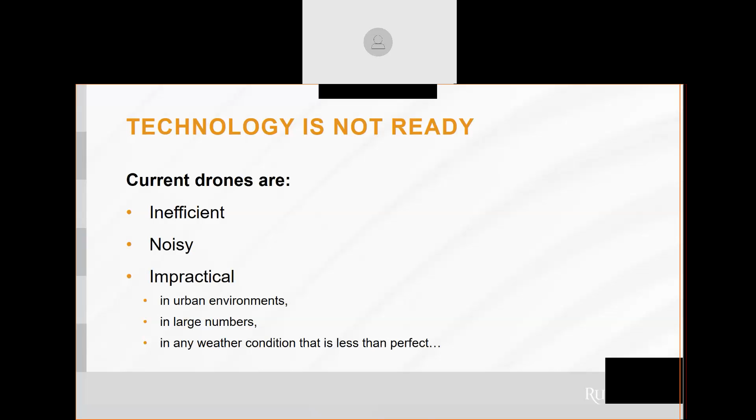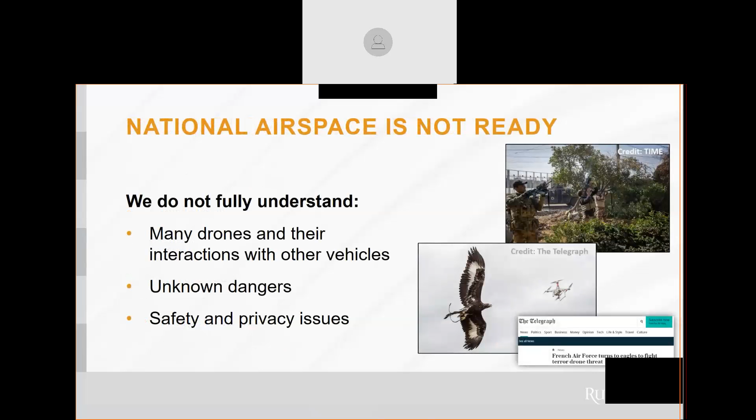So to move forward, we need facilities to design, manufacture, and test drones. We also need to be able to control air traffic due to operation of these drones. And we recognize that no such place currently exists. So we proposed a solution. We believe that the airspace and technology issues will be solved in the next 2 decades by research and development. But the solution is really to enable that research and development and to enable operation of vehicles developed with that research. So to this end, we propose to establish what we call a drone port. Okay, this would be the world's first center for aerial automation.

So in the long run, a drone port should look, or function at least, as an airport-like facility with an ability to serve a large number of air vehicles and passengers. And a drone port could essentially be located in an urban area. So, for example, like the Penn Station for trains or the Port Authority for buses in New York City. And in this image, this artist's rendering, we're showing a bespoke design of a future drone port vision located in Manhattan to show how a drone port might look in the future.

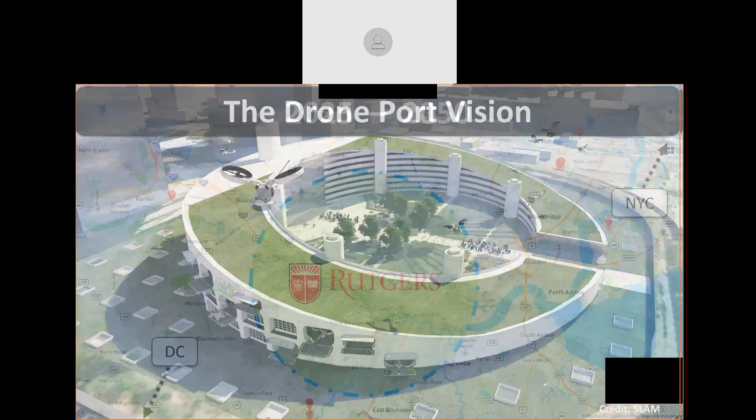And these applications would include food transportation, medicine, first aid delivery, emergency Wi-Fi service, agricultural automation, environmental monitoring, so on and so forth. So it's clear, right, that a drone port in Manhattan is not yet feasible. And we also know that such a facility cannot be possible without institutional capacity and also starting this in the right location. So we thought that we could do this in Rutgers or near the New Brunswick campus.

So this is a map of the campus in New Brunswick. And a drone port on or near the campus would allow us to have locally controlled airspace. And in fact, we don't have any restrictions within this airspace that is shown here. So one of the advantages of being in this area is that we're located in the busiest metropolitan corridor in the United States. Our location has access to New York City, Philadelphia, DC, Boston.

The area supports a 1.6 trillion gross product economy, and this is larger than all but a handful of economies around the world. And New York and New Jersey are home to the nation's most extensive public transportation network and two of the largest container ports on the East Coast. It's also the busiest location for supply chain activities in the nation. So we thought that there's simply no better place to build a drone port.

Okay. So from 2025 in the short term to 2050, the drone port at Rutgers will primarily serve for research and development. And as research ramps down, the passenger transportation would ramp up, along with the regulations and technology. So in the future, the Rutgers drone port will actually become part of a network of ports all around the world. So this is just potential airways to different cities, and of course, urban transportation within the cities.

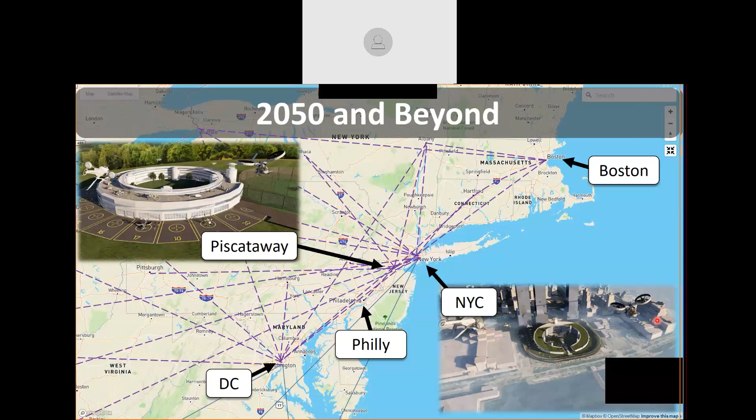So there could be flights across the nation, and all of these so-called drone ports could be modeled after the Rutgers drone port, which would have been the first one of its kind. And so who knows? Maybe either my vision or somebody else's vision of a drone port will actually become a reality in the future. So this is kind of a summary of the proposals that we made.

Okay. So my main goal has been to propose, model, and test mechanically simple designs to solve common engineering problems. So what do we mean by smart materials? Smart materials can be materials that change their shape due to external stimulus beyond what so-called conventional materials do. We know that many materials, especially metals, expand and contract because of temperature. However, this effect is very minor and it's not very useful in most cases.

However, when we talk about smart materials, we can actually have metal alloys that can change their shape significantly with the change of temperature. Certain materials change their shape because of applied electricity. That would be called a piezoelectric material. Some materials have the ability to heal themselves after they have been broken or separated or cracked. These are self-healing materials, and these would also be considered smart materials.

So instead of taking common materials or traditional materials and assembling them in complex fashion to get functionality, if we can actually build function within the material and use the material by itself without combining it with other systems or other materials, then we can make much more efficient and lighter structures and much more intelligent and

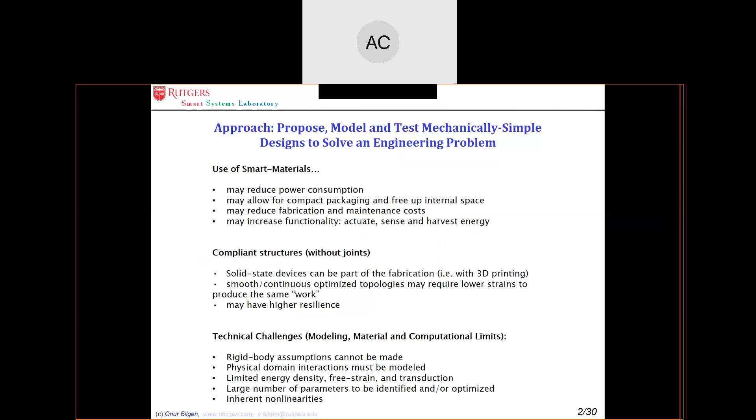So I don't want to go into too much of the technical details. I'll just talk about a few things. The material that I'm going to be showing today is a piezoelectric material. It's a type of smart material. Basically, what it does is that when you apply force to it, it produces electricity or charge. In return, if you apply electricity or charge to it, then you will get motion.

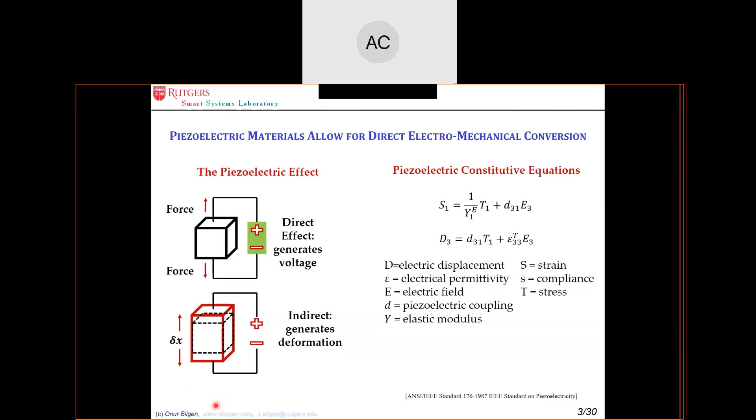So this so-called indirect piezoelectric effect is what I'm going to use to apply electricity to the material to change its shape, and this shape change will be used to change the shape of aerodynamic structures. And we do this based on a very simple mechanism. So let's just look at this one here. We have an active material, or a piezoelectric material. I will apply voltage to it.

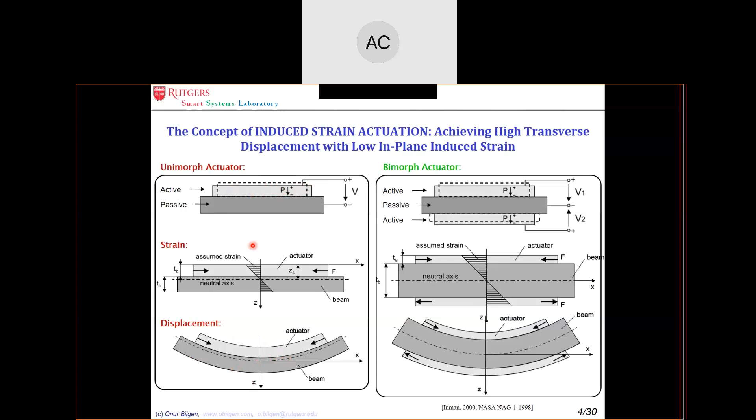And when this material at the top surface expands, it actually moves the passive material attached to it. And because there's an offset of this expansion force at the top level, the overall motion is a change in curvature. So this plate expands in the horizontal direction, whereas the overall structure changes its curvature. So this is the underlying mechanism that we're going to use to generate large shape deformation using a very small amount of motion.

Okay? So here's the outline of my presentation. We'll first look at smart materials and their application on small aircraft. This is kind of the beginning of my research. Then a few years later, I moved on to airfoils. Then I worked on a solid-state ornithopter, which is more of a bird-like drone. And then recently, I've been working on applying a similar technology, this kind of compliant, bird-like, wing-like technology, onto rotors.

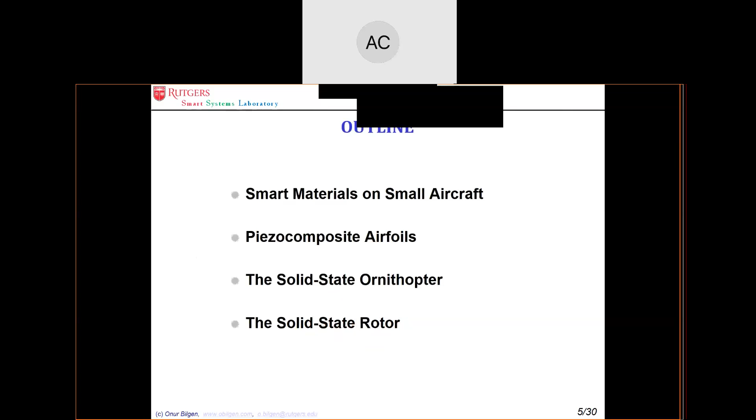So we're going in chronological order here. Demonstration on small aircraft. When we first began this research, there were very few examples. In fact, there were no examples of exactly what we did. So in 2006, 2007, when I was a student at Virginia Tech, I modeled, simulated, fabricated and then tested this aircraft, which has these piezoelectric materials.

So these orange patches here are patches that deform the surface. When you apply electricity to it, this wing actually changes its curvature. It cups, or basically curls, as the electricity is applied. Normally there would be motors and actuators, maybe 10, 15, 20 different parts to achieve the same thing. With this design, we achieved the change in shape of the wing with technically only two parts, the active material and the passive substrate here.

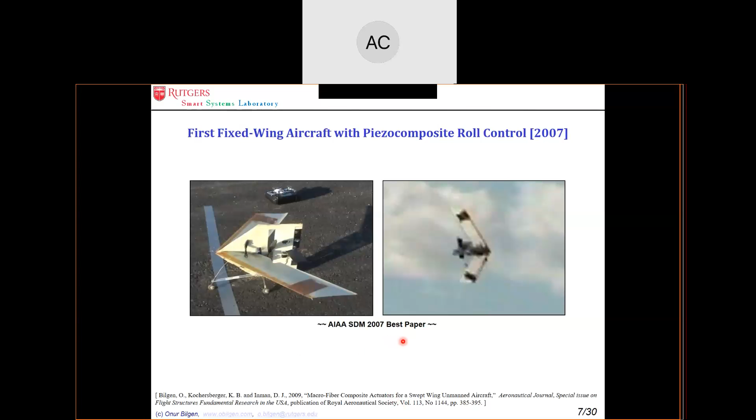At one of the conferences, the AIAA SDM conference, this research received the best paper award for the entire conference. So that was one of the starting points for us. I then went on to co-advising a senior design project with my advisor at the time, based on that aircraft that I showed you earlier, which was actually my master's thesis. So during my PhD, I worked on this.

One of the things that we had to solve in this project was electronics, small electronics. These actuators use high voltages, and at the time there were no compact electronics to get from low battery voltage up to high voltages. So this is one of the challenges that we solved.

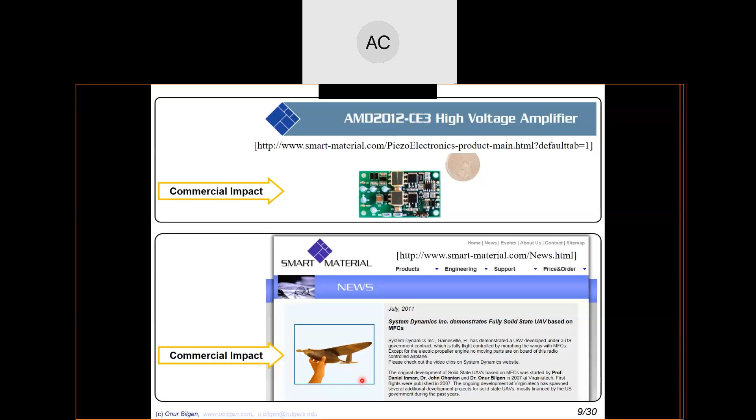So to remove the propeller, to have the wings create not only lift but also lift and thrust, is actually a big challenge. So this is actually one of the projects that I'm working on now. Right.

Next thing that I worked on are the piezo composite airfoils. So I'll just talk about modeling and optimization very quickly. In every step of my research, I try to do the research process from A to Z as much as possible. So I start with conceptual design and then some detailed design and then modeling and then simulation and then optimization and then testing certain specimens and validating them.

So this is one of the concepts that we came up with to address some of the drawbacks of the previous designs. We thought about where we can put the piezoelectric materials, how we can hold this airfoil shape, okay? To be clear, what you're looking at is an airfoil. Airfoil is basically the cross-section or a slice of the wing, okay? You can think about the wing, either the bird wing or the aircraft wing, protruding out of the page as you're looking at it. And if you take a slice of that wing, this is what the interior structure might look like.

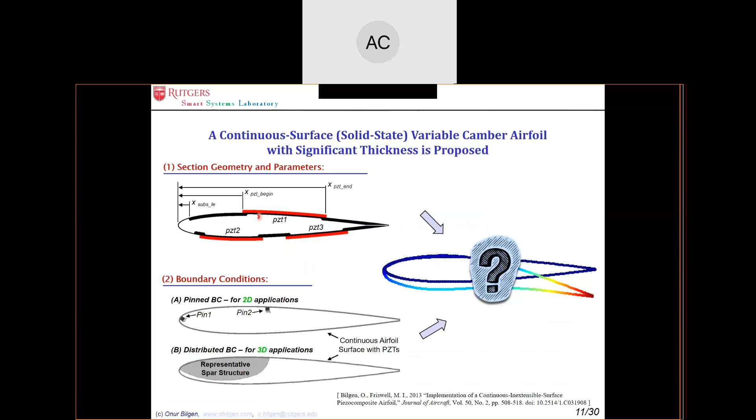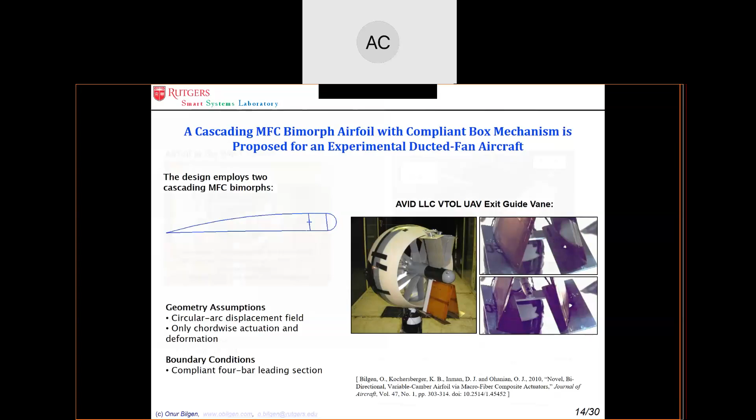So we did some modeling, simulation, and optimization. We don't need to talk about this now, but that led to some prototypes. So this is one of them. This is where we developed, again, an airfoil, a slice of a wing, using two different types of piezoelectric materials that are on top of each other. And we put this 4-bar mechanism to give it the right motion. And then that led into this prototype that you can see here.

So you can see that the motion of the wing or the airfoil, in fact, looks like a bird's tail, perhaps, except that there are still some mechanisms here that are not very desirable. There are benefits and some simplification because we used smart materials, but there are still mechanical components that are not desirable.

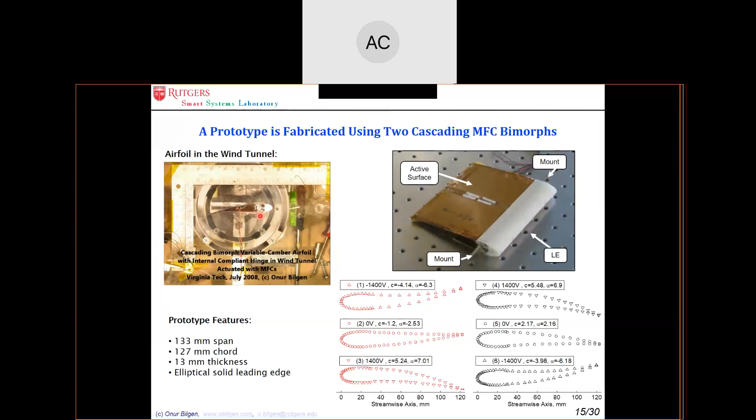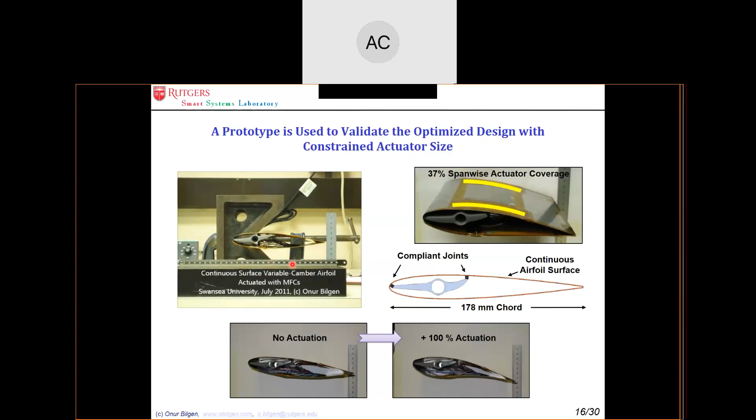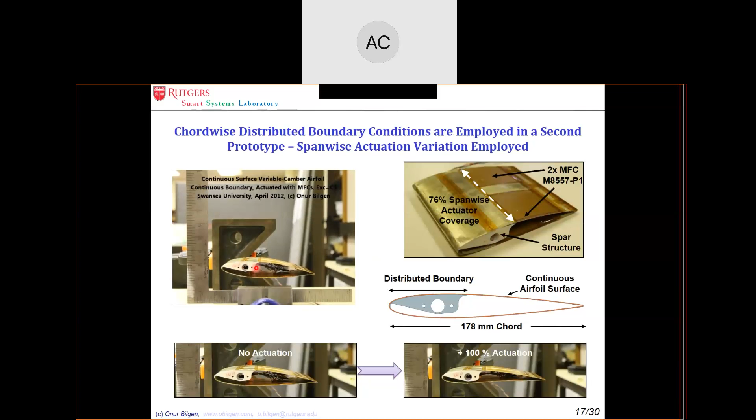So we went on to trying to eliminate those mechanical complexities, hinges, etc. So we did some additional modeling and simulation and optimization. We came up with this structure. And then also we came up with other structures. So this one is another airfoil that we optimized for a different type of conditions. In this case, you see the airfoil doing some sort of a breathing type motion. So this actually led to us thinking about a pump using this structure, okay?

Right. So from that research, which is just a section of the wing, what we call an airfoil, we thought about trying to look at the entire wing, and in fact, use the wing not only to produce lift, but to produce lift and thrust at the same time. So this is what birds do. Birds achieve flight by using their wings, just as fixed-wing aircraft do, to generate lift if they have forward velocity, okay, or any kind of velocity, but also to provide that forward velocity they have to overcome the drag force, so they need propulsion.

In a fixed-wing aircraft, the propulsion is achieved by either the jet engine or the propeller that you see mounted on the wings or in front of the nose of the vehicle, depending on the aircraft that you have. Birds achieve this by simultaneously using their wings to flap in different orientations to achieve not only lift but also thrust at the same time, right? So they can produce propulsion and they can use their wings to generate lift and also to do maneuvers.

So we wanted to be inspired by this mechanism, and so we wanted to make a drone or an aircraft with flapping wings, and these types of devices or systems are called ornithopters. So we looked at actually a preserved wing of a great blue heron.

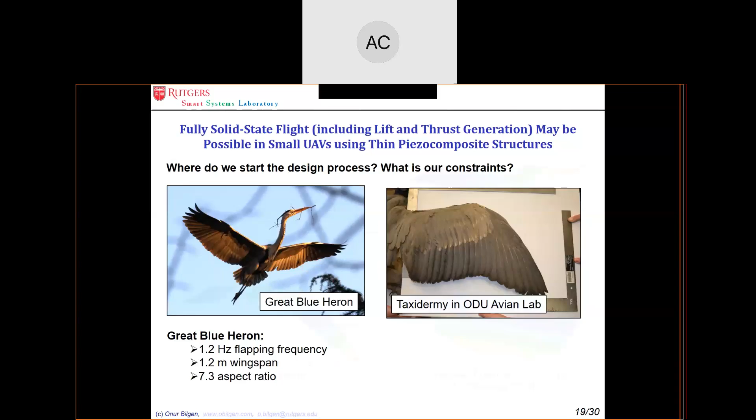We did, again, dynamic modeling of the wing. We looked at different motions that it generates at different frequency of excitation. We then took carbon fiber. We manufactured a wing mimicking what the bird wing looks like, the great blue heron wing looks like. We added these smart materials or piezoelectric materials on the wing to make the wing flap, pitch, and heave.

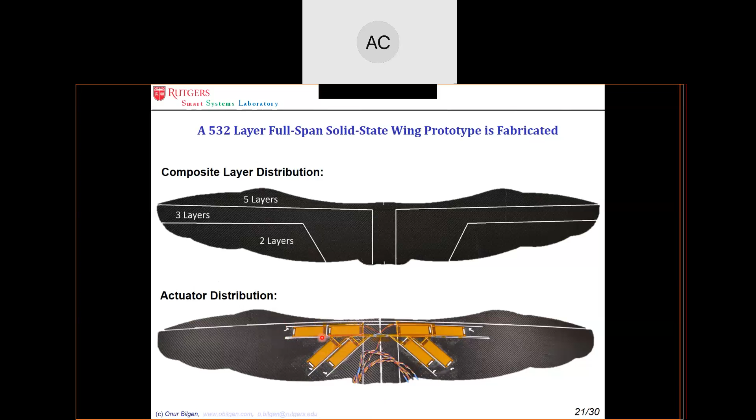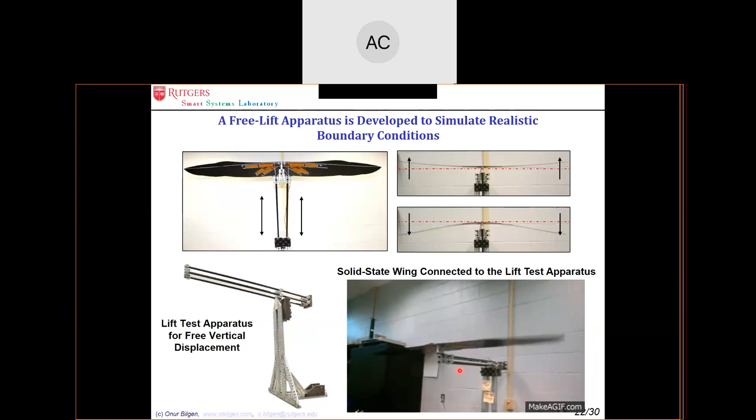And then we developed a test apparatus to kind of be able to test this wing. So now you see that using these piezoelectric materials just adhered on the surface of the composite, the wing is flapping just like a bird, okay? So this is still far away from generating thrust, but we're basically making progress towards that goal at this point.

So in parallel or soon after, I also started taking this idea of moving the wings of a bird-like drone into basically the blades or the wings, so to speak, of a propeller. And this actually is what ties into the drone research. So the idea here is that, as I mentioned earlier in the first presentation, the major problem with drones is the noise that they generate.

And of course, that's the major problem with helicopters, aircraft, and this is the reason why operating a helicopter or a helicopter-like device in your driveway or an airplane-like transportation system in an urban environment currently is just unimaginable. It's just not practical and it will not be accepted.

So the problem is that the common propulsion system, which works by taking a wing and simply rotating it in place, generates a lot of disturbance to the flow, which is necessary to provide the propulsion. However, it creates this fluctuating flow, which then yields large levels of noise, acoustic emission, and this is what becomes unacceptable in many urban conditions.

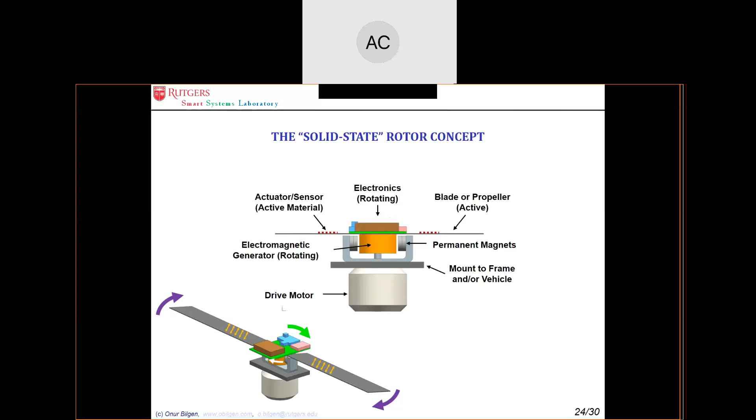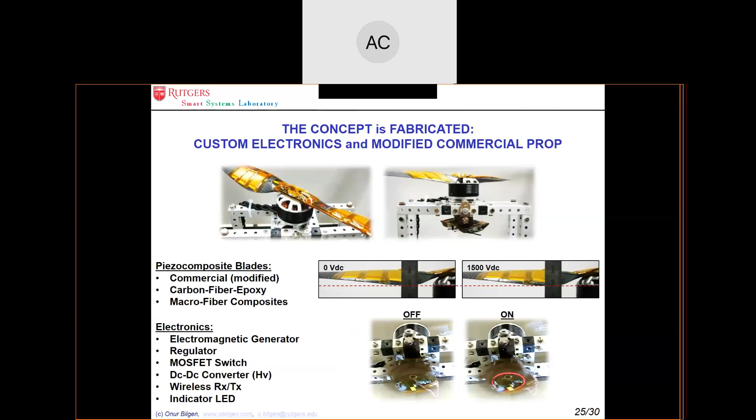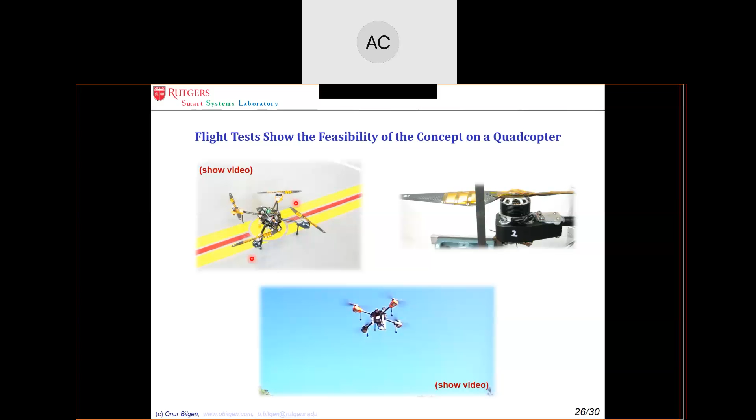So we successfully developed this idea. We built a prototype. We showed that it is operational. And we took that idea and then actually built a small quadcopter or a drone. We implemented the idea onto the 4 rotors, and we flew this aircraft. We've done some different prototypes of the same rotor concept. So this is another one that you see here. You're looking at the propeller from the top. It's actually on a bench stand to measure thrust force.

So I'll show you a quick video of what the operation looks like. Okay, so let me pull this into the screen. Okay.

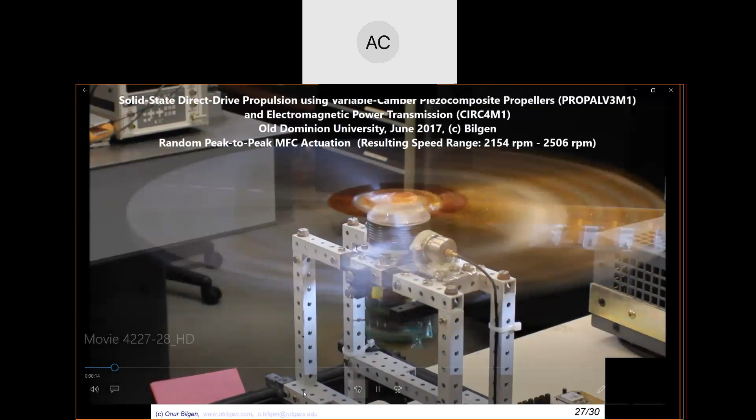So this is actually a test where we're running a strobe light at a strobe frequency. So it's basically a flashing light onto the propeller. It's spinning so fast that with the naked eye you can't see it, but the strobe light is synchronized to the frequency of the rotor. So it creates almost like a static image of the rotor. So what you can see is an image of the propeller in rotation.

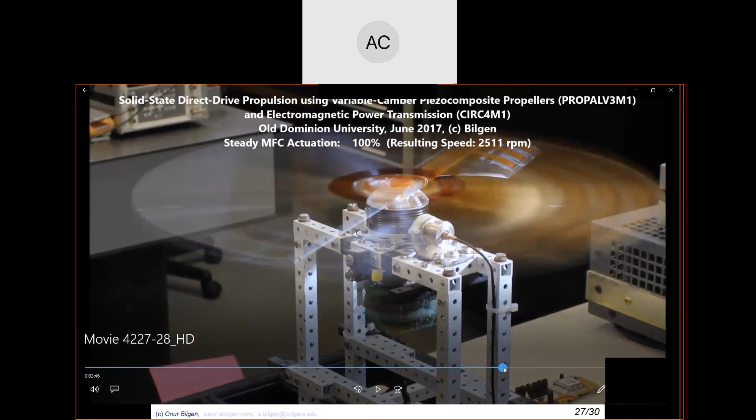But then the piezoelectric materials are here, you see them. And the shape is relatively flat because they're not actuated. So a little bit later, what I do is I actuate them. I turn them on. And then you might be able to see.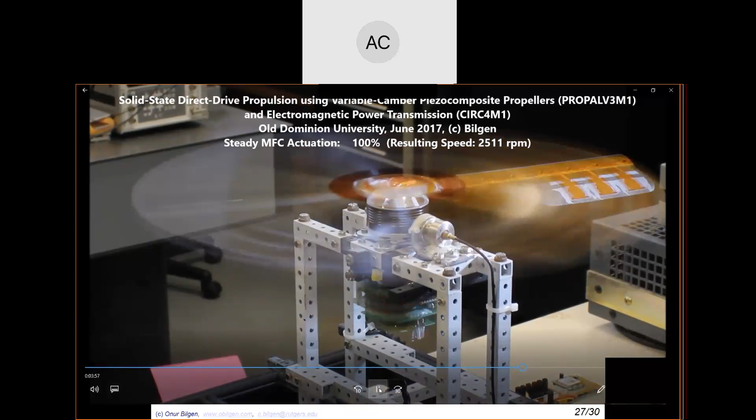Okay, so it's the same propeller, except we applied electricity to this piezoelectric material. Now this plate is actually curved. So when it was flat, it was producing very little thrust or propulsion. When it's curved, now it's producing a lot of thrust. Okay, so the advantage of doing this is that we can directly change the shape of the propeller on the rotor without mechanisms, without motors, etc.

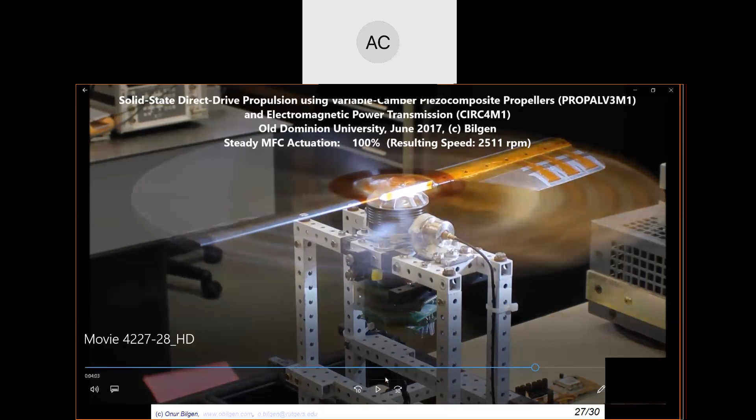And we can do this very fast. So because we can do this very fast, we can actually do acoustic control to limit acoustic emission. Normally you hear this sound, and this is actually quite annoying, of course. When it's a large propeller, this is actually much worse.

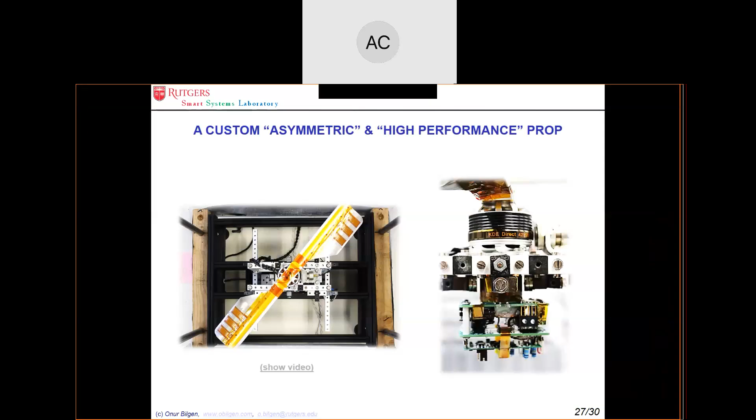So that's one of the prototypes that we built, and my students here, I advised a senior design project last academic year. So they have continued on this research, and they've developed this structure or the test stand, which now is kind of a helicopter-like system. So we wanted to demonstrate this on a helicopter type system.

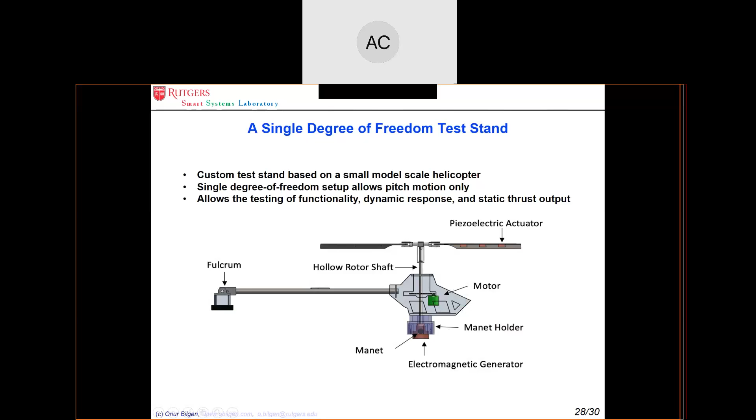So we took a commercially available small helicopter, or a toy helicopter basically. We put it on a fulcrum or a hinge to restrain its motion to just this vertical direction. And they built the prototype. We built the blades on it. And so here are the piezoelectric blades. Here's the conventional mechanisms that come with a helicopter. Here's where the hinge is.

So this vehicle would actually go up and down. This is where the electronics are, and then this is the controller, and the background is just basically my home office because this was in April, so I was doing experiments at home.

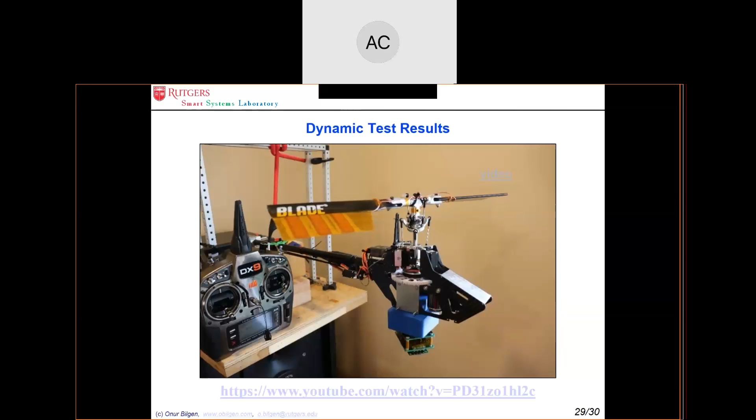Let's see. Okay, so I wanted to show you a video of this. Okay, so here's just a basic operation of a helicopter. Some of you might be familiar with this. This is called a swashplate here. So it's operating, of course, it's free to move up and down. So what we're going to do is we're going to turn on the propeller. It's going to start rotating, which shows its basic operation.

And there's a segment of a video where I'm actually controlling the piezoelectric material. So you might be able to see from this little bit of shadow here that what I'm doing in the control is that I'm actuating the shape of these piezoelectric materials, and that's what's causing the blade to move up and down. So I'll try to, yeah.

So as I'm moving this knob, I'm actually sending a wireless signal to these electronics that sit here. The signal from those electronics goes through a wire that is inside of the shaft, and those wires are connected to the blades with the piezoelectric materials. Those piezoelectric materials are changing curvature, and that change in curvature is increasing and decreasing the thrust. That's why you're seeing the entire structure moving up and down, because more thrust is being produced.